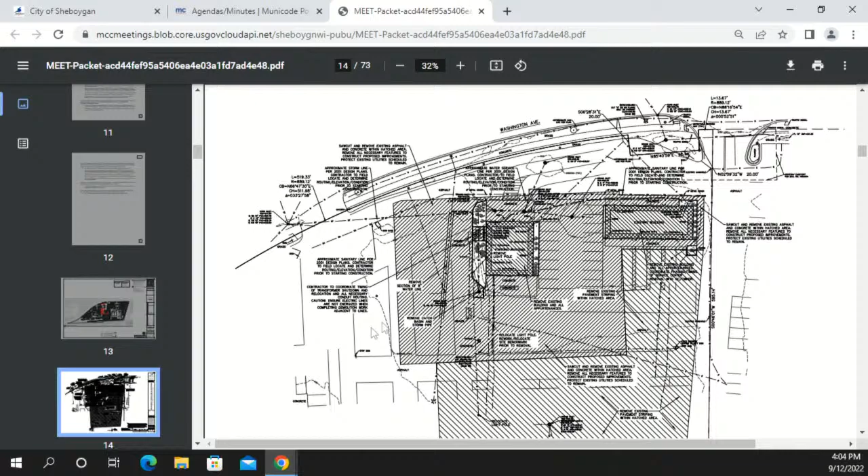I'm sure you guys are quite familiar with this location off of Washington Avenue. Currently what exists out there is the Quick Lube building, located on the left, and a 2-bay car wash located on the right-hand side. What the group is looking to do is eliminate both of those buildings and replace them with one single building, essentially.

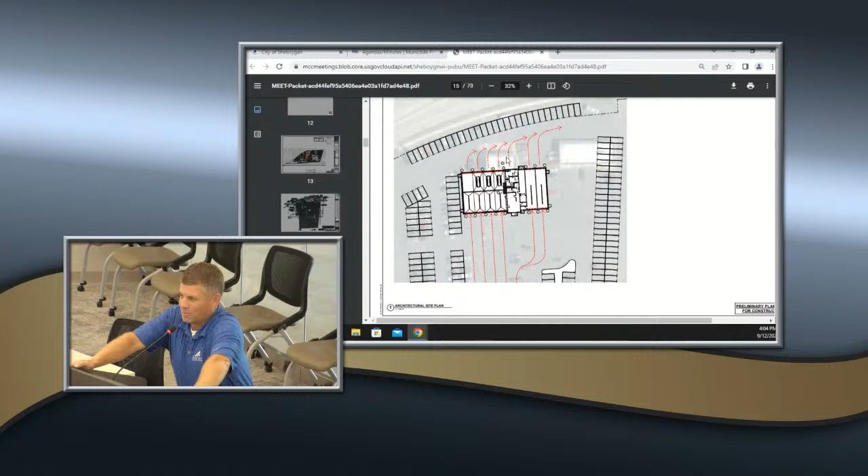I don't know if you can zoom in on that, Steve. Is that close enough? Yeah, that's fine. So what this represents is basically a dual building that'll house both the car wash, the 2 bays located on the east side of the building, on the right side there. You'll have an office area, bathrooms just left of that. There will be 3 quick lube service bays just left of that, which will have an 8-foot pit for oil changes and whatnot, as well as storage of materials and oil, waste oil, things like that. And then on the far left, there'll be a designated emissions test lane, essentially.

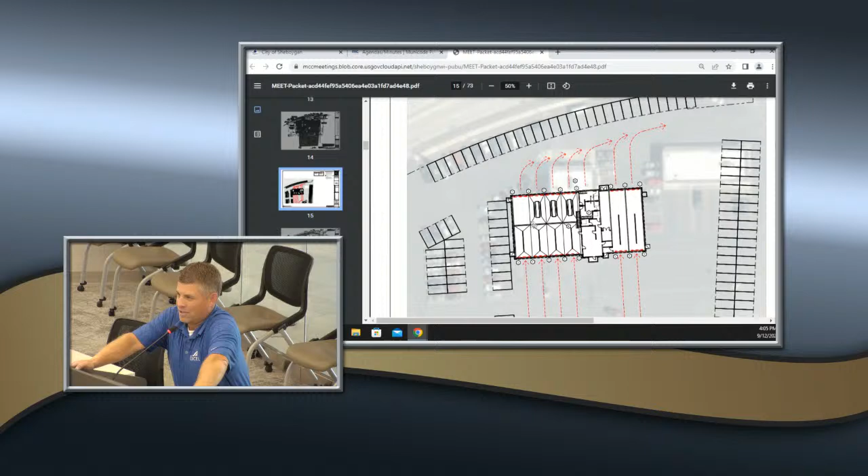Then, if you want to flip to that, we'll reconfigure all the line striping out there in the vicinity of where the two existing buildings were, allowing the new building to fit, reconfiguring striping for the vehicle lanes, and then filling in where the old buildings were with vehicle parking and vehicle storage.

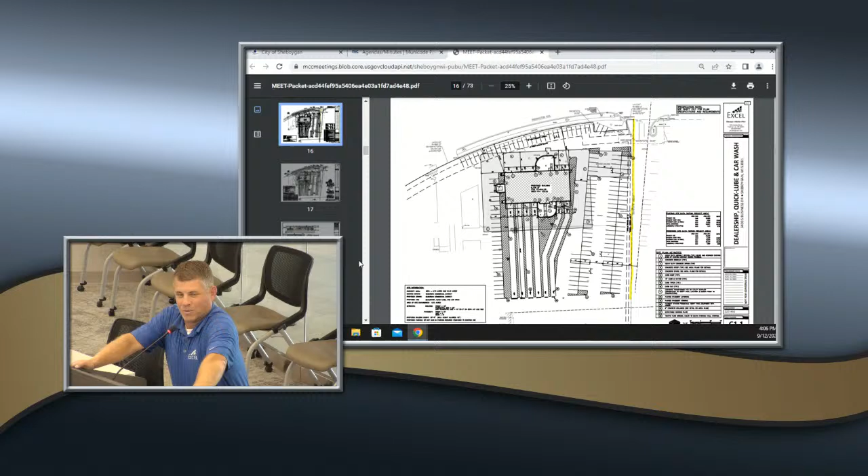I know it was mentioned in one of the staff comments about the dumpster enclosure not having one. We will be proposing one, most likely on the west side of the building. Right now we're thinking split face masonry block, painted to match the main color of the building. And for the gates, we'll be looking at steel construction with either painted cedar wood or Trex composite, no-maintenance material.

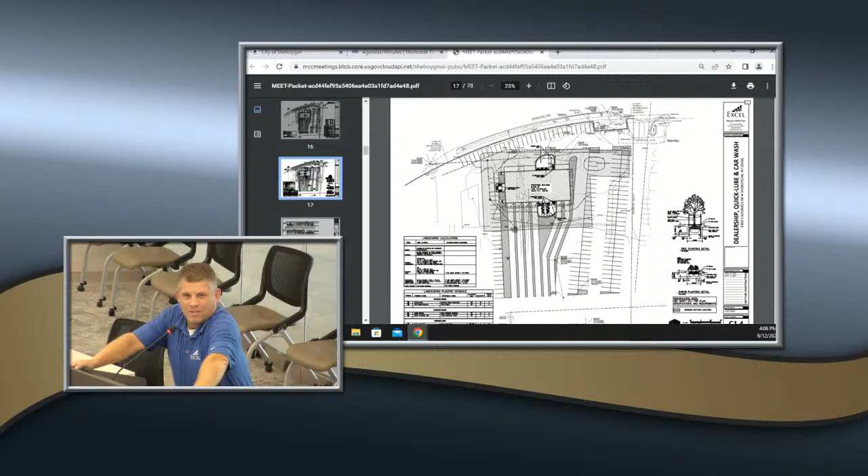Guys, I don't know if you want to talk about the architecture a little bit.

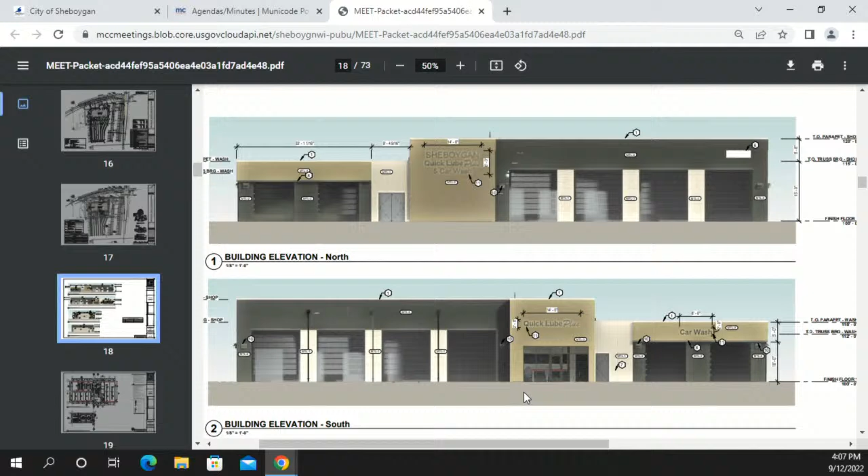Sure, yeah, so this is Kyle Jameson from Designer Group, and these are the most updated elevations that we have. So we're using 3 colors.

All pre-finished metal panels on the outside, and what we're doing is essentially variations of those colors in order to break up the facade. The north elevation is the elevation that will be street facing. So by breaking it up into its different components of car wash and shop space, as well as that center, I believe the color that they call that is...

It's not champagne. Champagne is the white color, but the gold flake type of color that the signage is on is that center portion, and that is actually pushed out, a plane compared to the rest of the building.

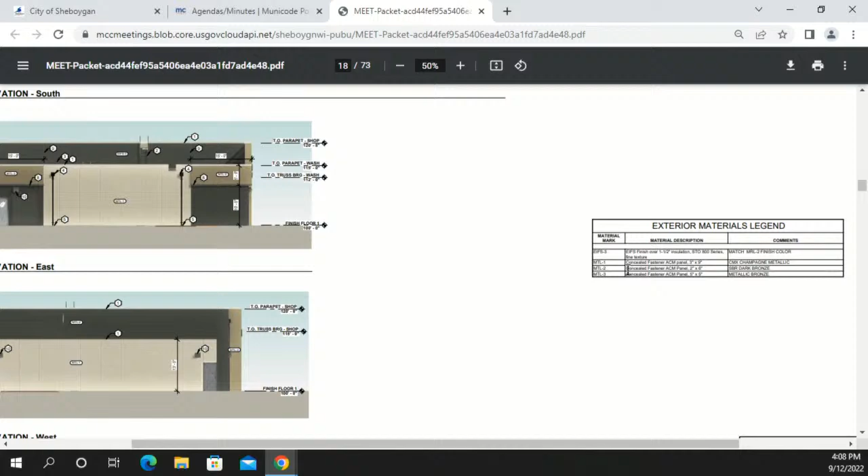So it's just a variation of depths and colors in a way to break up what is otherwise a pretty large facade. And then we also are using glass overhead doors in order to break that up as well.

The major entrance is going to be on the south side, south elevation, where the lobby entrance is, as well as the queuing of the lines for vehicles coming in. There's going to be signage on both sides of that, as well as possible signage on the west side.

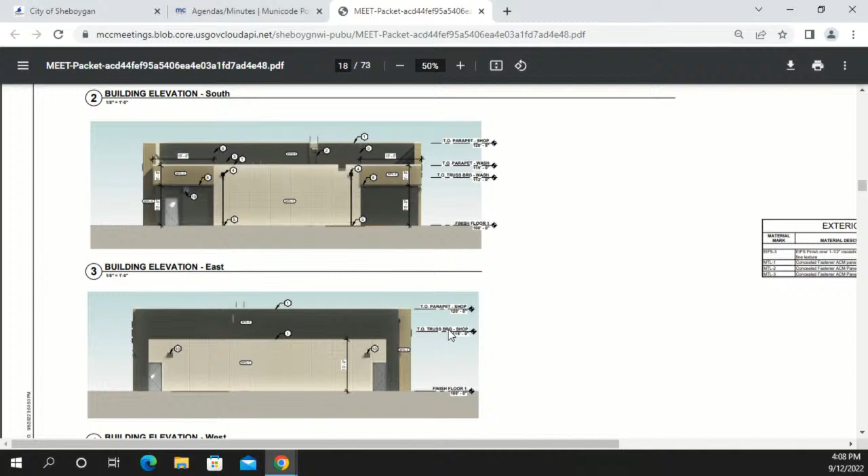I think part of this project was asking for the signage.

Yeah, there's some questions about signage, and that would be before Plan Commission tomorrow. So you don't have to worry too much about that tonight, other than just describing a little bit of what you guys are looking at.

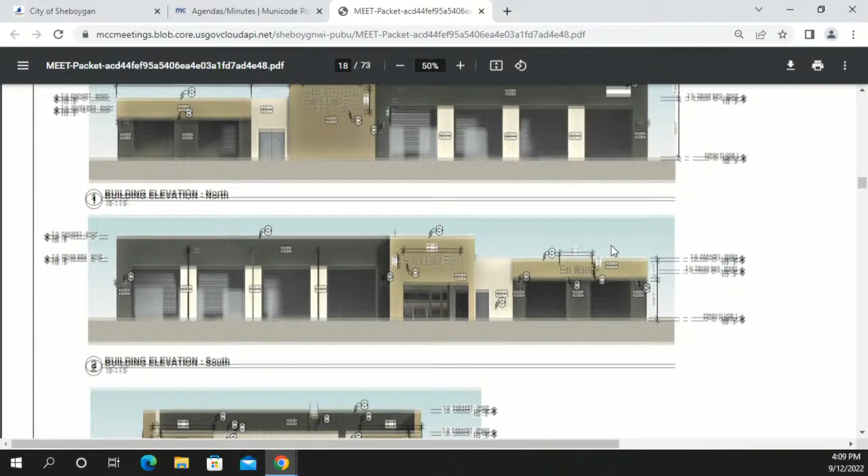Sure. So if we don't have to worry about that, the other thing is that central gold portion that kind of runs north to south on there has a lower parapet, or a lower roof, with a taller parapet, and that's where we're going to put most of the mechanical equipment in order to hide that from the street facing as well as customer facing sides.

So part of what we defined in the elevations of these buildings was also designed to help step and break up the facade a little bit, so that there were variations in heights to make this easier to visually see and not be so harsh, but yet complementing the 2 car dealerships that are also on the site. And like Kyle was saying, the doors and the color variations were designed to help break up the facade.

Any questions, I guess, you have for the exterior that I could help assist answer for you? Yeah, I will start out with those.

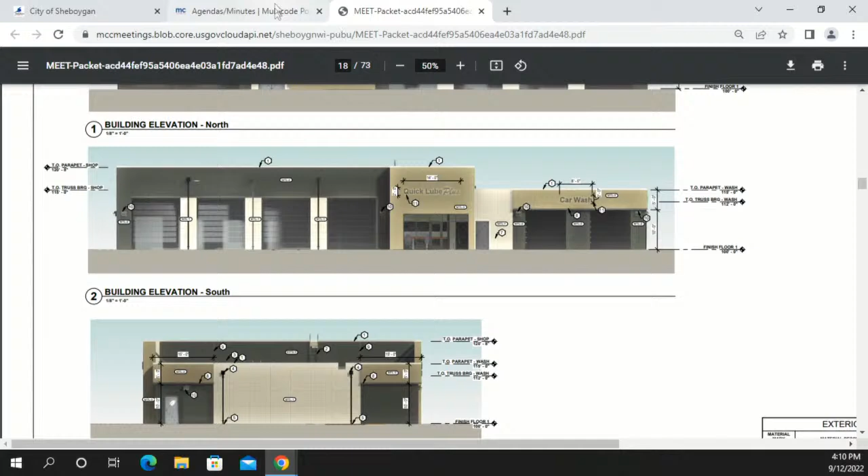You mentioned the complementary to the other buildings on the site. I guess I'd like just a little more clarification on that, since it appears to be so different in color from the other buildings. It'll definitely stand out, and I like it as a building. Just curious about the thought process with being so different from the color schemes already out there.

So I can address this. This is Nate Herbst, the applicant with the Rydell Company. There's 3 primary colors, and one of them is champagne metallic. It's a silver ACM paneling that's probably the primary color on the building, and that color really kind of ties the building into both the Chevrolet facility and the Chrysler Dodge Jeep Ram facility.

But yet, those franchises, the OEMs, the manufacturers, tell us what colors we need to have in order to be compliant with those brands. So we have one color that ties the facility into both manufacturers, and then we have 2 colors that are...

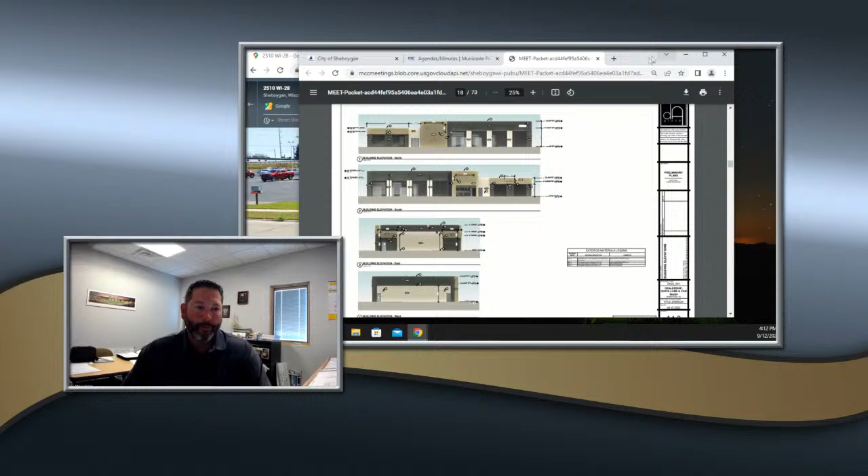...not the manufacturers', because this is an independent facility. It's not synonymous with GM, Chevrolet. It's not synonymous with Chrysler, Dodge, Jeep, Ram, and we felt that was important, to make sure they blended in, but this facility is also unique to itself.

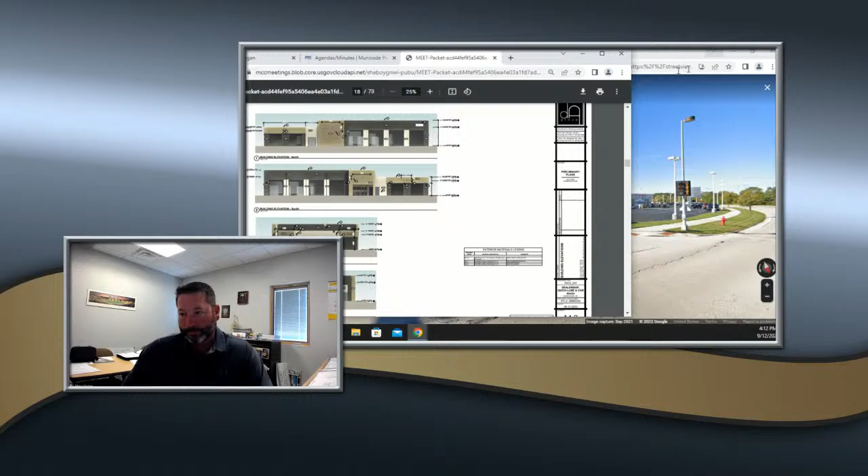Okay, and then a couple of other detailing questions. The yellow, I think you called it the gold flake color, it seems like where that generally falls on the building, it protrudes out from the rest of the facade, with the exception of the west elevation.

Although that may have changed from what I had previously. I was out of town last week, and I got an opportunity to get the new drawings that they had previously sent to me attached. So there could be some changes that may have addressed some of those issues.

That does answer that question. The revised drawings take care of that issue. The second question I had was about the band of the gray EIFS. I think you still have it as EIFS.

I believe the council chambers is muted. Technical issues, so you can't hear us right now? We can now. Okay, thanks.

So on the east elevation, where you have the building step and you transition from the metal panels in the gold flake color on either ends of that high element, and then you go to EIFS in a gray running above the roof wall connection there. Just curious if that was something that could be maintained as the yellow metal material, or even eliminate that, since I think that was the only EIFS on the building, just so that yellow element is more continuous.

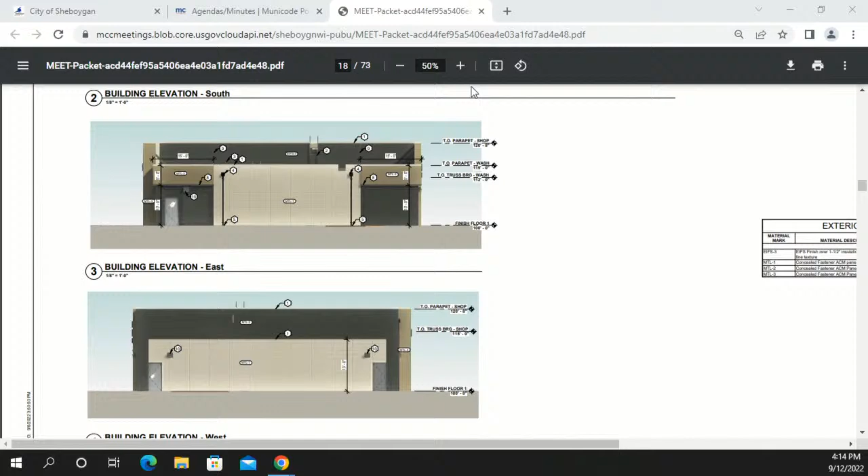Yeah, so on what you're seeing as that sort of black color, if you go to either the north or south elevation, on this elevation right here, on the south elevation, that black wall is actually a continuation of that larger mass with the overhead doors. So it's actually, when looking at that south elevation, it would be the east side of where the gold flake color is, where that wall exists.

You're just kind of seeing through, since there's no mechanical or anything showing on that elevation where you see the EIFS. And so it's inset quite a ways from that gold flake color. And being most of your mechanical equipment's going to be a grayer tone, it would be more advantageous that it's going to blend in with the darker gray and not stand out from that east side as you would approach from that direction.

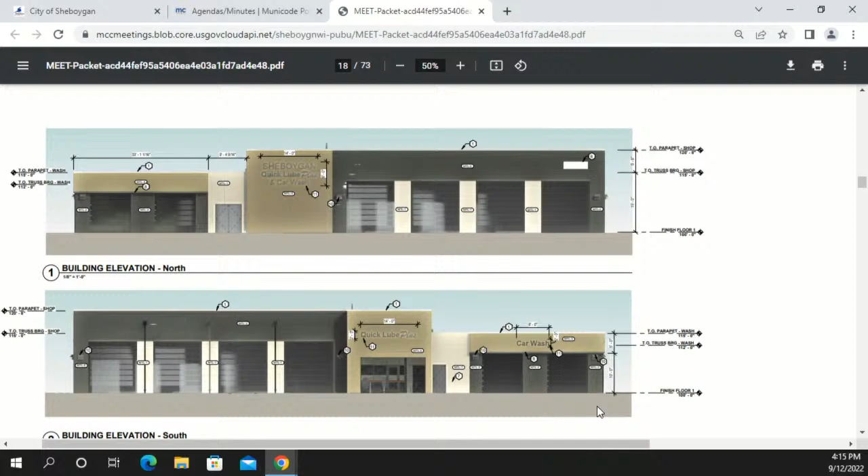Versus trying to go to a gold flake, you're going to have a tendency to see any of that equipment more so stand out against a gold background than against a gray colored background. That would be my only reason for wanting to keep it to a darker color tone, is to help hide somewhat of the mechanical equipment that would be along that face, while still having some break up to the exterior look of the facade.

Yeah, okay, I see that with the ladder placement on the north and south elevations. Which then leads into my next question, which was, you've got the big parapet around the lube bays. What about equipment above the car wash? What equipment is there, and is that also screened? What is the parapet height there relative to the equipment?

So all of the equipment from the car wash will be above the lobby space. Otherwise, most of it is internal, next to the lobby, and sort of what we've been calling the core space, which is the lobby, restrooms, locker rooms. All of that is sort of that gold area with the champagne color next to it. That is the core, right in there, that long skinny mechanical space next to the lobby, between the lobby and the car wash.

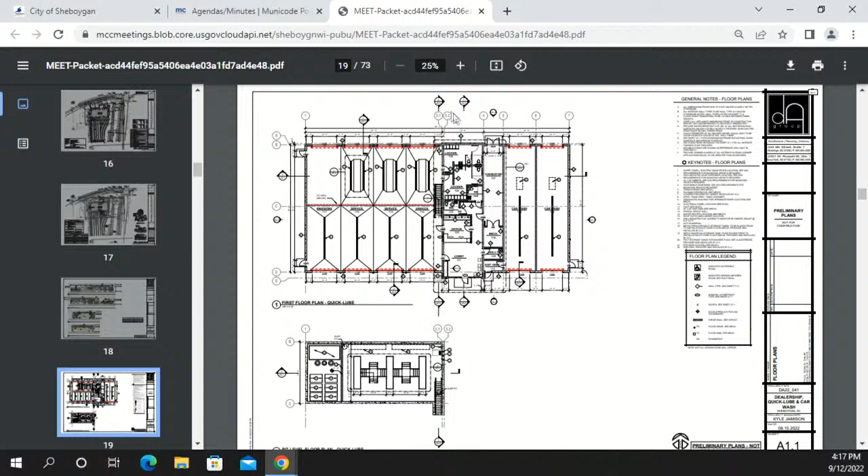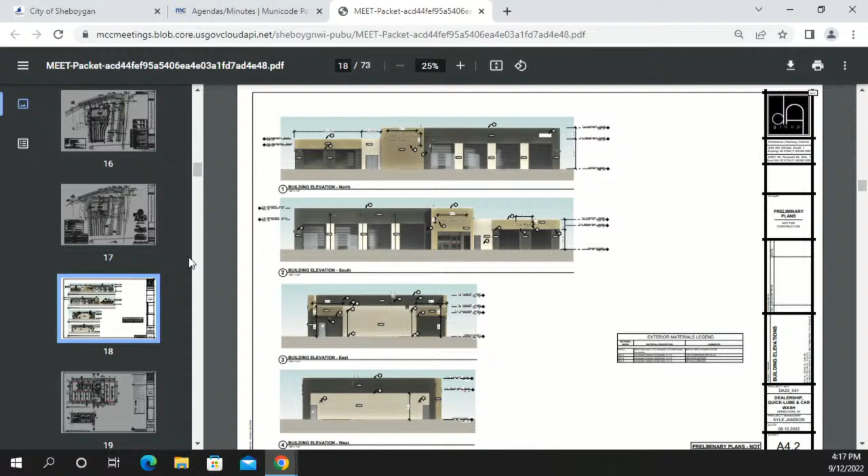There's going to be a lot of things for that car wash specifically in there. If there's anything that needs to go up on the roof, it's going to go above that lobby. But you're saying that is all exposed from the east, so we would be seeing it there on the east elevation? You would see some of it from the east elevation, but all of the equipment is way up against that backside of the building again. Most of the equipment is going to be a couple rooftop units, I think there's a total of two. They might have added a third one, but there's two rooftop units.

So if we needed to put something in there, would a mechanical louvered screen system along that face, matching the color scheme of the building, be an acceptable alternative option if it was too visible from a long ways away? As I'm envisioning what you're describing, that would be ideal.

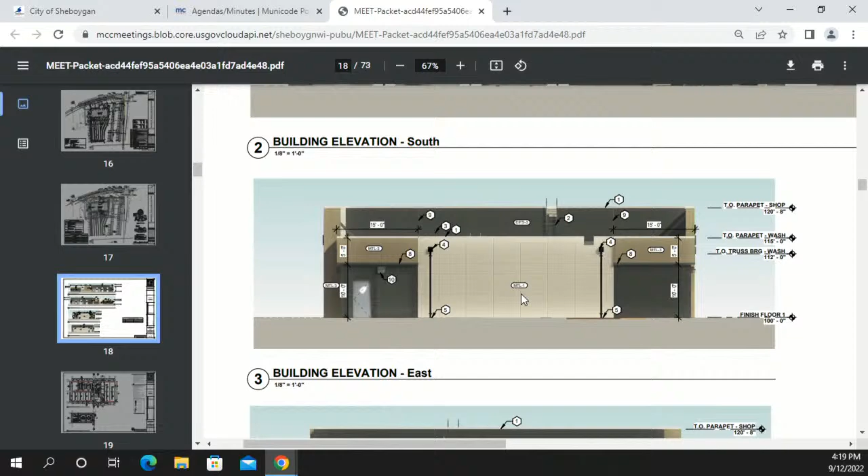To kind of create a third or fourth side on that raised gold flake element that hides the equipment behind it, I guess looking at the sight lines from the east as you drive up to the site, just to see what those are relative to the height of the equipment. I think that would be critical.

As I'm picturing that drive-through from the east coming toward the west, I think that's probably going to be visible, but some sort of screening there would be great. If color-wise it can tie into that yellow flake, that would be fantastic, but even something more subdued there would be okay too with me.

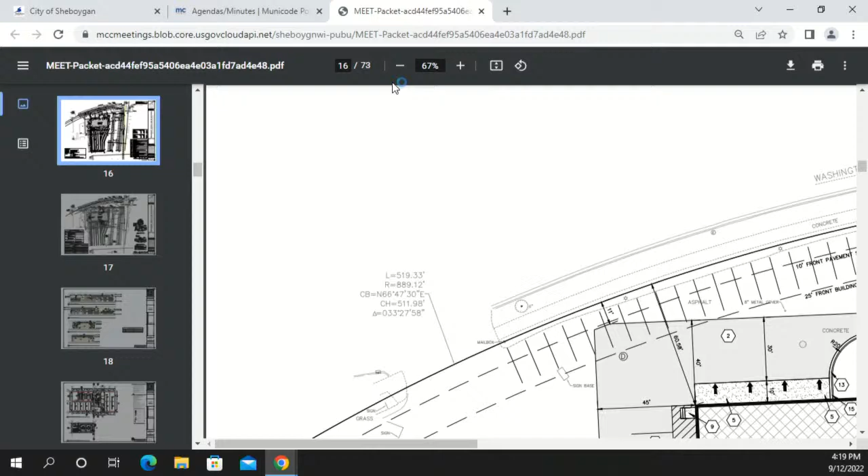Going back to one of the questions, the dumpster enclosure - you said that is on the west side, or maybe I misheard that. Is it on the west or the east side, closer to the car? It will be on the west side. I believe it's not incorporated into our elevations quite yet, but it will be. If you zoom in on the site plan, it is showing on the west side, roughly halfway.

So I know there's a transformer there. Oh, that's the transformer. The car would be between the transformer and that northwest door. And that transformer is likely going to shift locations based on discussion with the power company.

And where is that going? Shift to where, do you know that yet? Based on discussion with the power company, I believe they want to locate it on the east side of this newly proposed facility, so that we can temporarily feed the existing quick lube during construction.

Looks as if that's going to be getting a little tight to your drive lane there. Yeah, most likely we'd fit it into that cross hatching on the east side, and if we've got to slide the building over a few feet, we'll want to maintain that 24-foot wide drive. Just concerned with whatever screening around that transformer being right up to that driveway - a little buffer there would be nice.

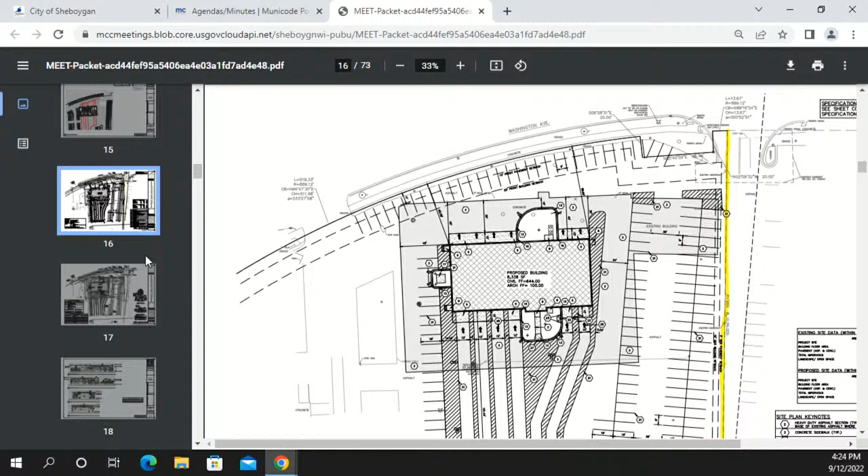I think the things to think about there are, in its present location, it's just next to parking spaces. Where you're talking about putting it now is going to be in a travel lane, so it would be more susceptible to vehicles, I guess you could say.

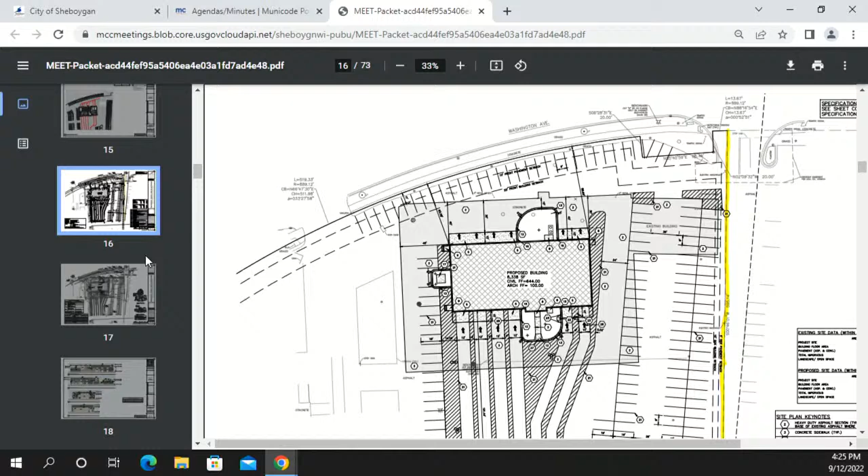Sure. Although if I'm reading it right, that isn't your main drive lane. You're still coming in from the lights a little further to the east, so you'd be driving down south of the facility and circling back. So it's maybe not as big of a concern as if it was right next to that main drive lane.

And no matter where it ends up, if we have to put a few bollards in and a protective curb around it, we're going to do what we have to do to protect that equipment, and provide the adequate screening as well. Which actually brings up the question of landscaping, whether that was reviewed by us.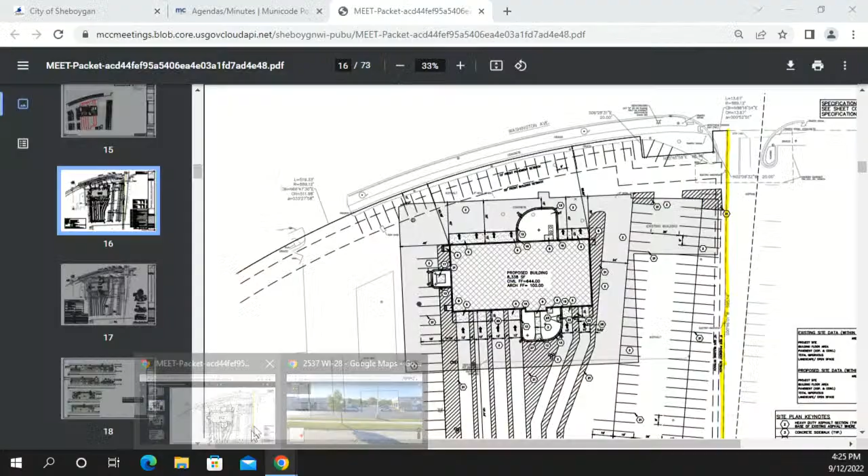I mean, it's part of our review a little bit tomorrow, but they show a little bit along, in this case, they're screening the transformer a little bit at their entranceways and things like that, so they might be asking for a few exceptions for foundation plantings and things like that, and relocating the number of points. But this is so far what we've received. Location exceptions? Yeah. Yep.

So we talked with Plan Commission tomorrow.

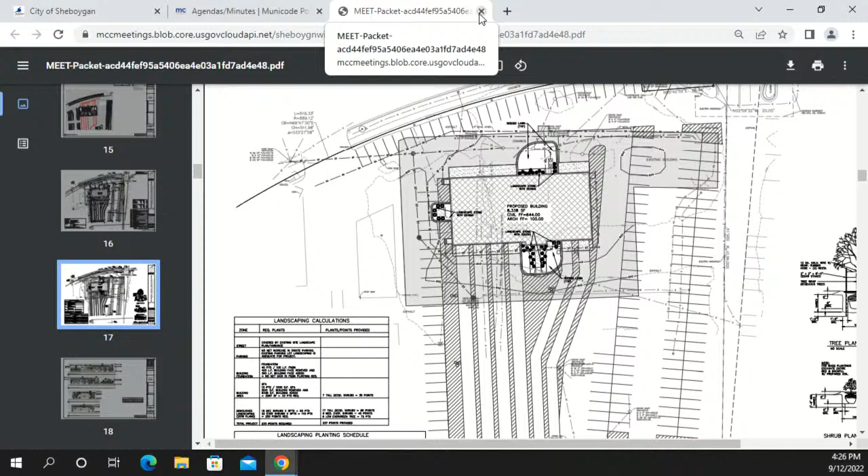Other questions or concerns? I'll make a motion to approve subject to staff recommendations and your additions. What I had in my notes were to be resubmitting plans to address the finalized transformer and dumpster locations and enclosures, at a staff level, correct? Yeah, to a staff level. Granted, if staff has concerns with those, it may get kicked back to architecture review, but hopefully that can just be resolved with Steve.

And then the other thing was the sight lines to the rooftop units or any equipment on the roof, and if need be, adding that additional screening and just getting elevations updated with that. So based on those items, that's correct, those were the items you wanted on there, Jim? Yes, it was. And everyone's clear on what we're voting on. We have a motion and a second. Any further discussion?

Hearing none, all those in favor signify by saying aye. Aye. Opposed? That motion is approved. Great, thank you very much everybody. Thank you.

Moving on to item number 6, the proposed construction of an addition and exterior remodeling for the dermatology clinic at 832 Michigan Avenue. If the Abacus team could come forward and make introductions and give us a brief rundown on what you're proposing there, please.

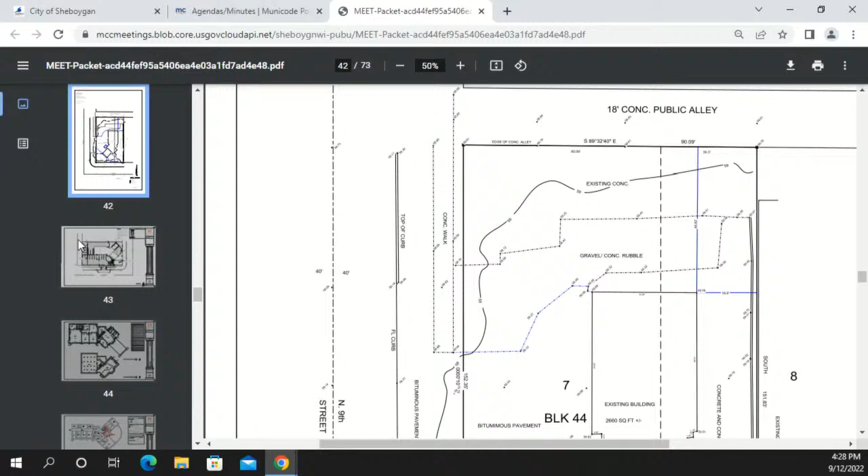So the proposed project that we have here is an existing vacant building. It's currently unoccupied. It used to be an old collections building at one point.

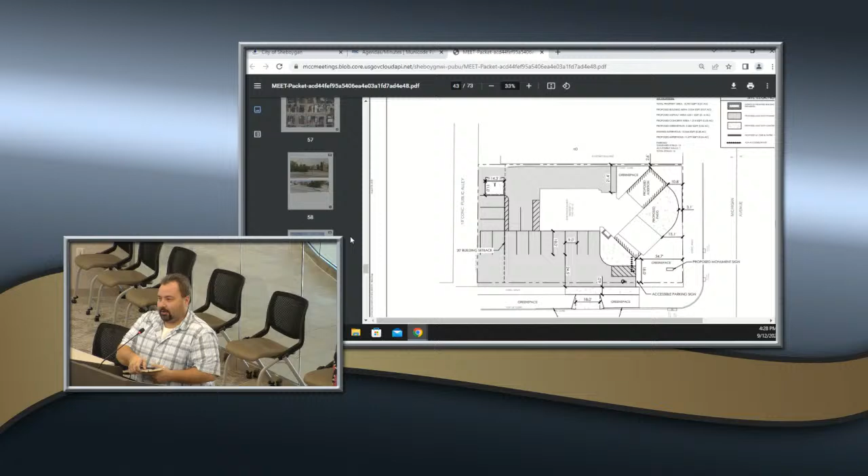And Keith, before I interrupt, could you step to the podium so it gets picked up in the mic, just so our recording gets it. Can you hear me better?

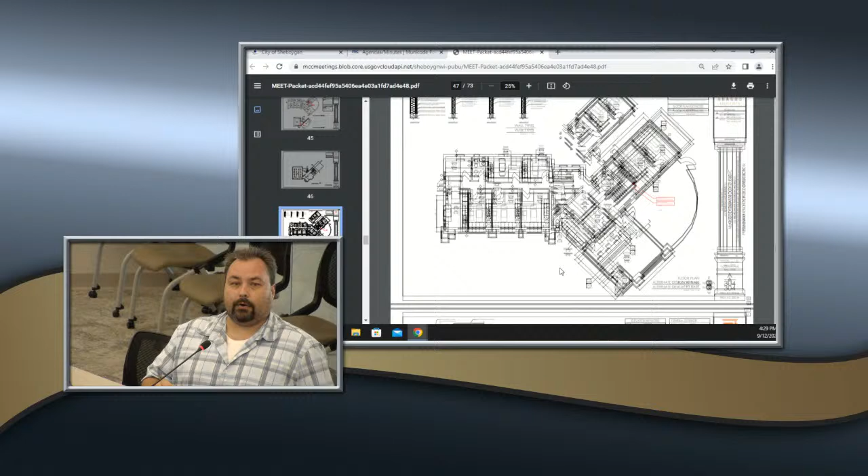So we're converting an existing building. It's a currently unoccupied building. Previously, it used to be a collections agency. Prior to that it was an automotive garage. Right now, we're looking to renovate it into a dermatology clinic. We've got some existing spaces inside, and we have a portico that's off to one side that's existing. We're looking to infill that portico, turn it into a waiting room and reception area.

On the southeast side of the building, we're looking to put on a little extension to add a couple exam rooms and a stair down to the lower level. The renderings you're looking at here show the front side of the building, which actually faces the side street, 9th, not Michigan.

The curved window on top is the existing portico we're looking to infill, along with the existing structure that creates the column wrap around that window. From the left, there's currently an asphalt roof, a little mansard roof on the side. We're looking to peel that off and turn all the asphalt into standing seam. With this addition in the portico area, we're looking to pull the face of that wall out to align with the wall just to the left, giving more room for a waiting room and a true vestibule coming into the space.

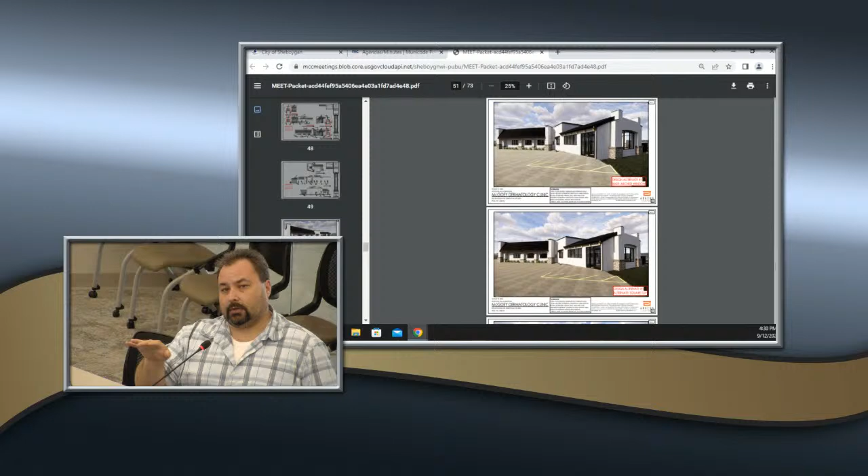That will change the slope of that roof slightly. We're looking to add some aesthetic glulam beams to look like they're holding and supporting that roof. The standing seam would be a dark bronze color to match the storefront and windows we have.

The top rendering here is a little farther left in the view. These used to be the old bays that led into the garage, filled in with windows and walls at one time. We're looking to retain most of that. The one window on the far left, we're looking to switch out and make a little smaller to work with the footprint inside.

There is an existing mansard roof over what used to be those garages, now over those windows. That is also asphalt roof, and we're looking to peel it off and make it all standing seam.

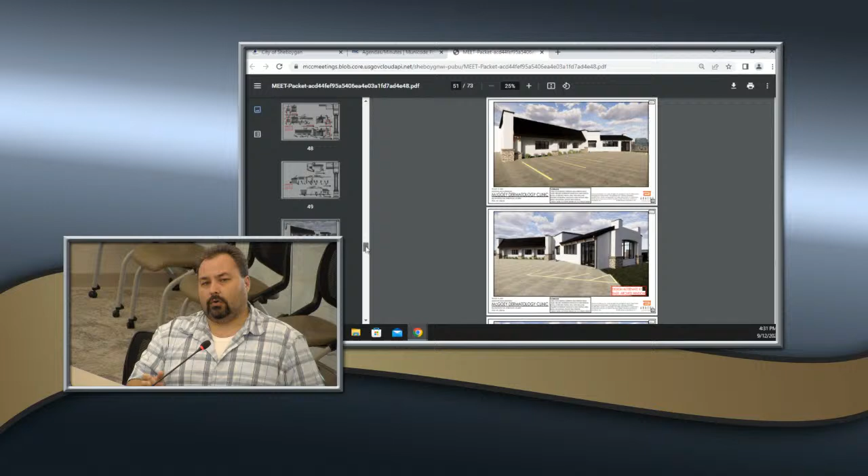The style of this building is an existing Spanish style, with clay tile roofs along some of the main white portions of the building. We're looking to peel some of that off and make it more traditional. The Spanish clay tiles would all be removed and changed to a metal cap flashing to match the standing seam.

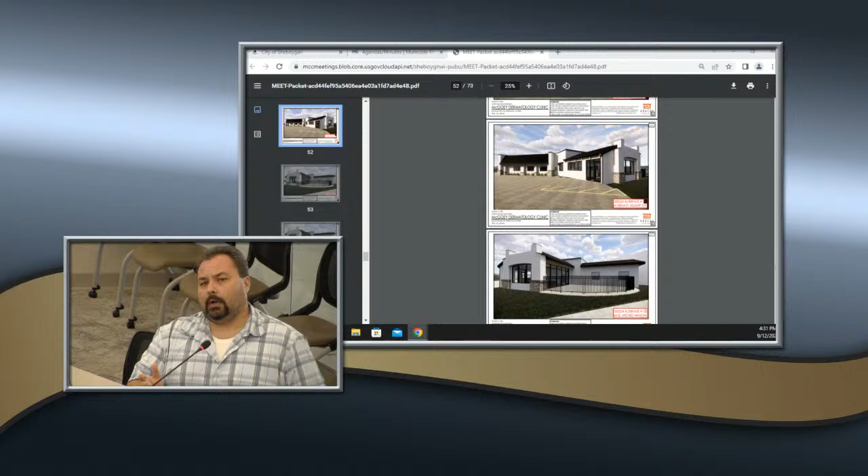The facade is kind of a light pale color. We're looking to paint it new. One option is skim coating the existing structure, which right now is metal lath and plaster, very hard to clean and maintain. We're looking to potentially skim coat it to make it all a flush look, without that Spanish style curved look you'll see in some of the photos.

Barring not being able to do that, depending on how the suppliers come back regarding adhering to that existing material, we may have a concern. If so, we'll just look at repainting the facade with a nice light gray color.

Also along the front, at a couple of the column bump-out areas, we're looking to add a little stone veneer, giving it a base with a cultured stone look, plus a precast cap on top of that.

All the windows around the new waiting area would be an aluminum frame, like a Kawneer type system. The windows around the building are a mix of existing wood windows and glass block windows. We're looking to update the glass blocks, pull them all out, and put in new aluminum clad wood windows to match the other windows we're proposing.

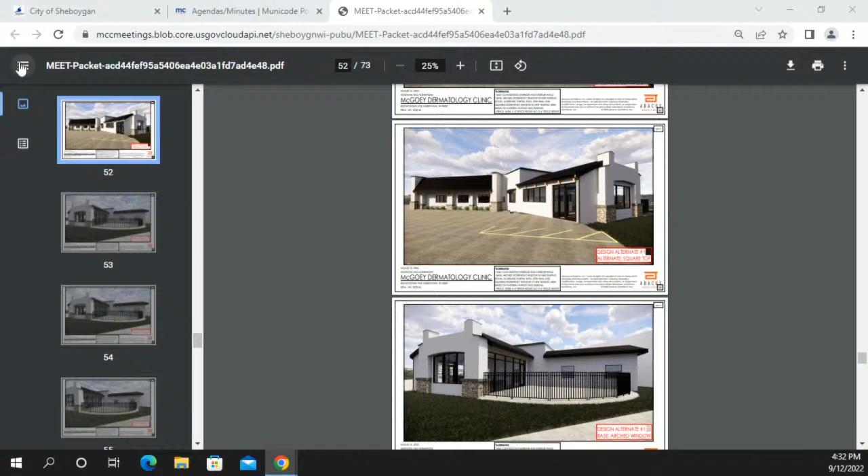Along the new addition on the right side where we're bumping out the building, you can see on that rendering we're looking to put in two more exam rooms with a stair leading down to the lower level. In that building, we're looking to use wood stud construction, combustible construction type 5A, or type 5B, sorry.

This facade would be just EIFS on top of the wood stud backup. The EIFS would be colored to match the rest of the building, so it would all be that light gray color.

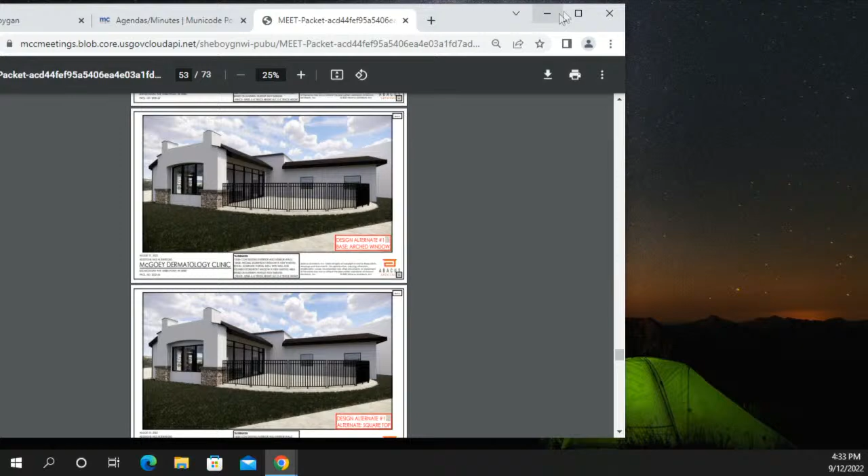We are proposing a small mansard roof on that addition as well, except it would only be on the 2 sides that face Michigan. The backside towards the property, which actually comes right up to an existing building, we're looking to slope the structure down in that direction with curb and gutter to collect, with a gutter and downspout to collect.

We're proposing in this curved area, which is along Michigan, infilling that with a patio and putting in fencing around the perimeter. We showed 2 options here. We're looking at different concepts of what we're going to purchase for fencing. We kind of like the double rail on the top, but we got to dig into the actual manufacturer for that, so that's why we proposed 2 different options there.

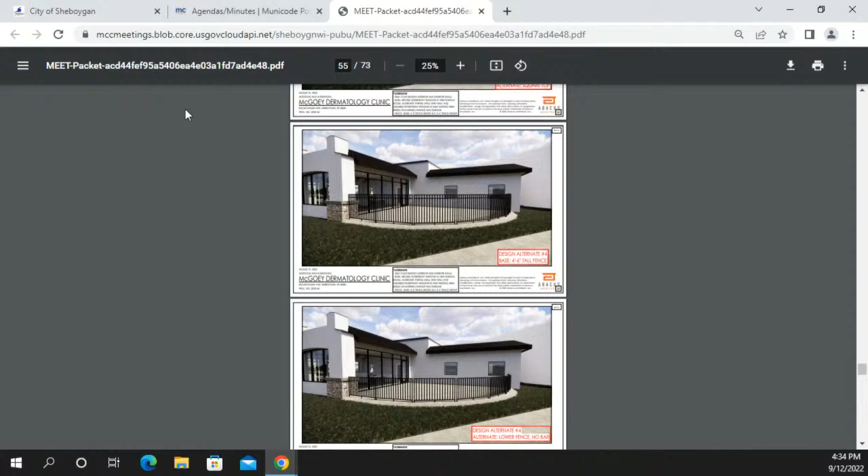So that's the main concept on the exterior. I'm sure Suzanne could talk more about what the facility is proposing to do.

Sure. The only addition I would have to the exteriors is currently it's basically broken concrete and also not paved in the majority of it. So in addition to cleaning up the exterior of the building, we'll be also repaving, remarking, and re-landscaping everything so you can see the building from the street.

Do you guys want to know outside only or inside? We're actually only addressing the outside, so whatever's happening inside, unless it relates directly to the facade, is really out of our venue.

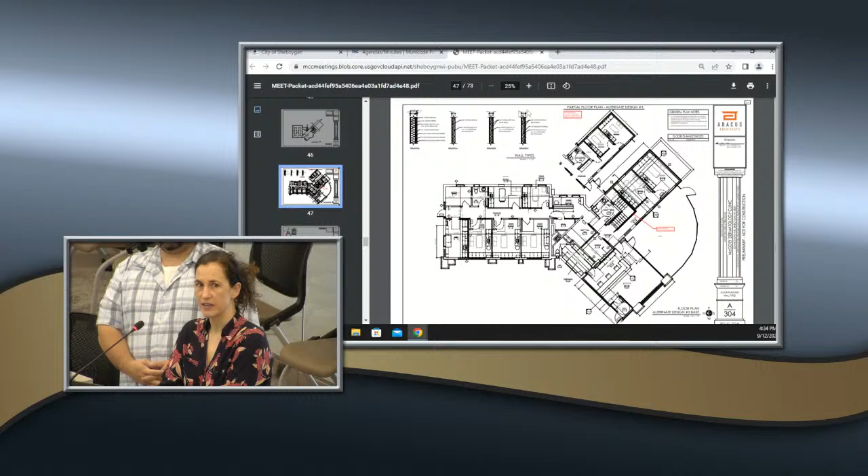The only other thing that we didn't discuss is signage. We do plan on bringing things before the board with the sign permits and whatnot, but we're planning on likely a monument sign abiding by all the regulations. I can't name all of them, but 15 feet away and not obscuring the view of traffic, et cetera. So we are working on that aspect as well. Not planning on a building mounted sign.

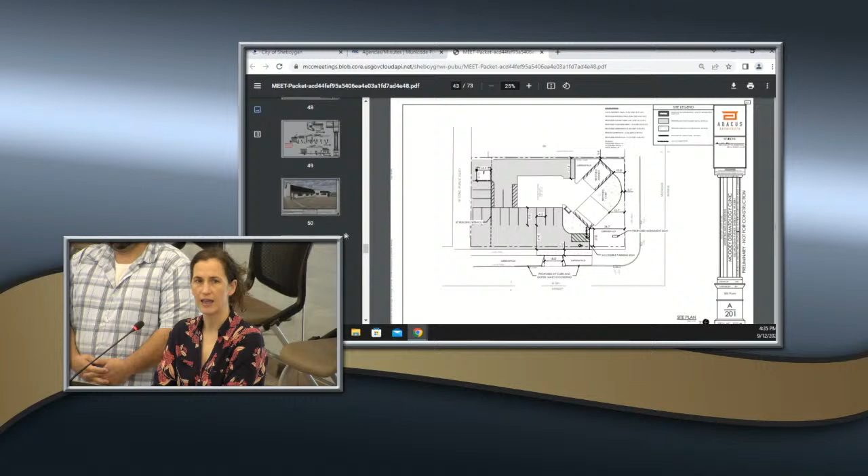And the other variation that we didn't discuss is the window itself. Right now, we would ideally like to do that curved window that matches the existing opening to the basically closed-in reception area, but it's going to be a supply chain question about availability. So we did present the option of it having just more of that square front.

In addition to the exterior and the fence, those were basically the options. There is a 4th option you'll see there where we were discussing whether or not we're going to do the stairwell, but we are planning on moving forward with the stairwell, though that's relevant more to the interior. Happy to take any questions.

Great, thank you. I guess first off with the alternates, since there were a lot of them and there were questions, could you go either way on those? Maybe to address those first, from my perspective, I didn't have a problem with whichever way you went on those alternates. I thought they were all relatively similar, and I certainly understand the supply chain issues at the moment. Any other concerns or things that the board saw that they would like to push one way or the other on those alternates?

My big question is, it's not really huge, but on the patio, what's the function of the patio? Just a seating area or? Plan is basically as a seating area, so whether it's patients on a nice day who want to go outside and sit, or staff having lunch breaks outside, we thought it'd be nice to get sort of foot traffic views for Michigan Avenue, especially through that redevelopment, so our plan was to try to make that more of an approachable space.

Yeah, and with that in mind, I would probably vote for the lower fence. That's just me. Just so you can have more of a sight line view versus the higher rail. It comes down to are you keeping something in or out, that kind of mentality. To be perfectly honest, our plan was to go with the higher one if possible, that's why we did put in for the exception.

Okay. Our concern is partially availability of that fence and the structure of it, it's not able to be cut down lower because of where that bottom bar is. The other part is this area of town does have a lot of bars at night. And given that our traffic is basically business hour traffic and then it goes dark and then there is bar traffic, we do want to make sure that we maintain the exterior in great condition throughout the course of our use of it.

Sure. I was going to mention the bars and comfy furniture in there. Right, high fences may be good. But that is one of the concerns. That's going to be such a visible corner for that patio.

Just making sure that it doesn't end up being a space that collects clutter. I hate clutter. The entire design inside of the clinic is to be not clutter. So if there is one theme of how I plan on designing everything, it's no clutter.

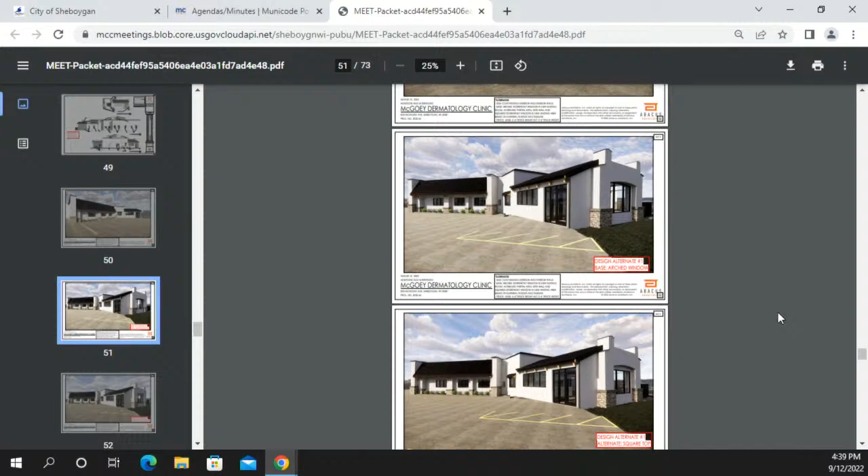To me, this is very much a professional space where I plan on spending my entire career. I've lived here for 6 years now. I plan on setting up shop and staying here and raising my family here, so I do not want to ever have to move out of this space. The maintenance of elements of the character, as long as this is done cleanly and nicely, should work out well.

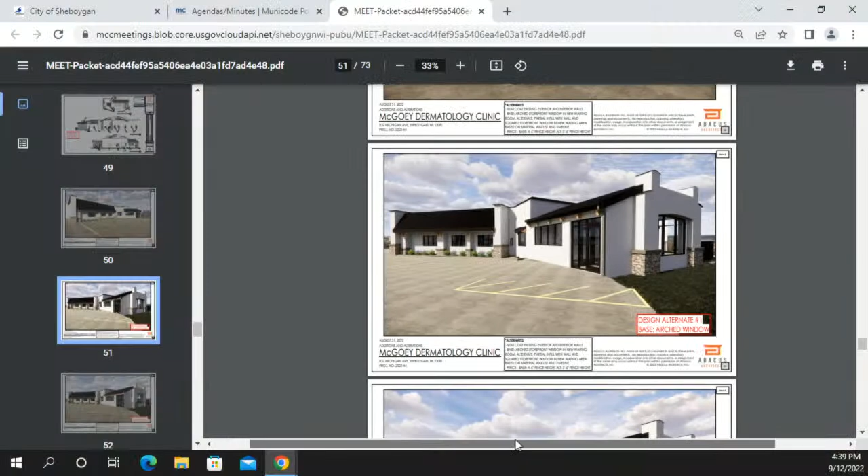One of the things, if you stay on this view, Steve, at the main entry where you've got the existing portico and you're adding the sloped roof area coming out from that - one thing that jumped out at me was that the portico, the arched element with the piers on the side, is getting integrated into the new wall coming out. I wondered if there was a possibility to introduce another glass frame element that would butt up against that original portico, just to set it off as a separate piece.

Are you referring to the side of the vestibule basically being glass? I believe we were told from a support structure standpoint it had to be solid surface. We actually originally had designed it as glass, but it couldn't support the new addition.

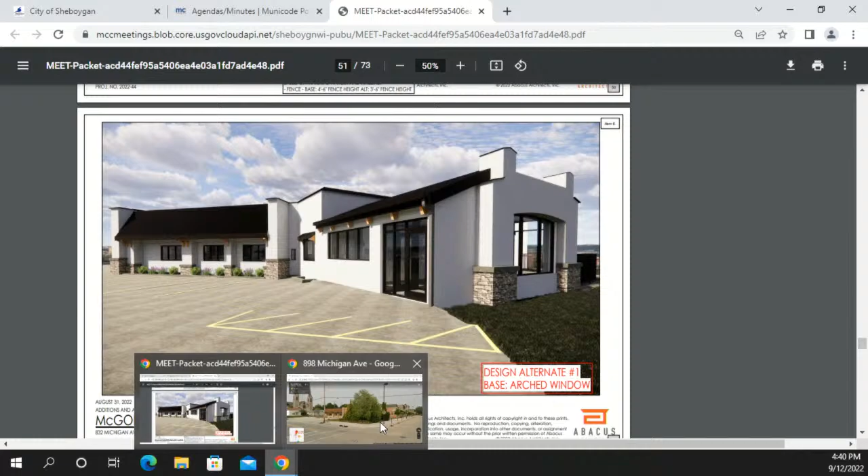So what happened there - the original design was to have glass there. With the pushing out of the frame, since we're changing the slope of this structure and attaching to an existing steel beam, the structural engineer needs a chunk of shear wall in order to keep the moment frame of that piece together. So we had to compromise and give a chunk of wall back to create a shear wall.

We did look at another option where we could get a very little bit of glass in. We'd have to actually shorten the vestibule on the inside and bring the shear wall in past the column instead of butting up to the column. So there'd be a little bit of a jut inside the building that we'd have to address.

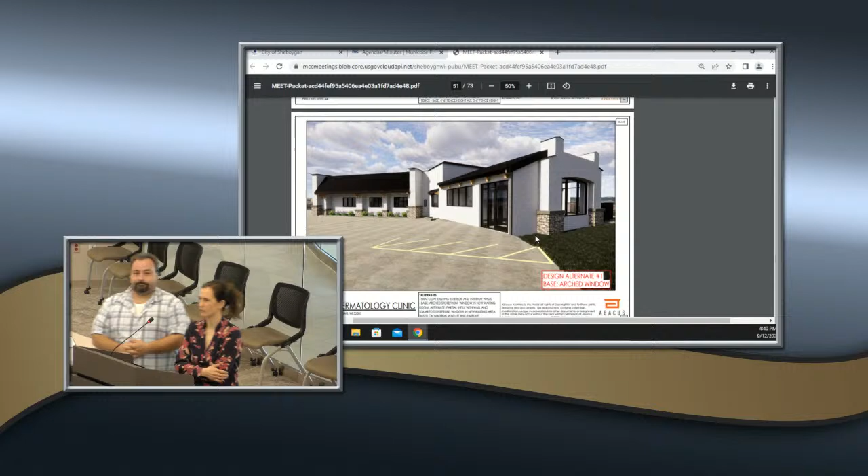Hearing that for the first time, I don't like that as an option.

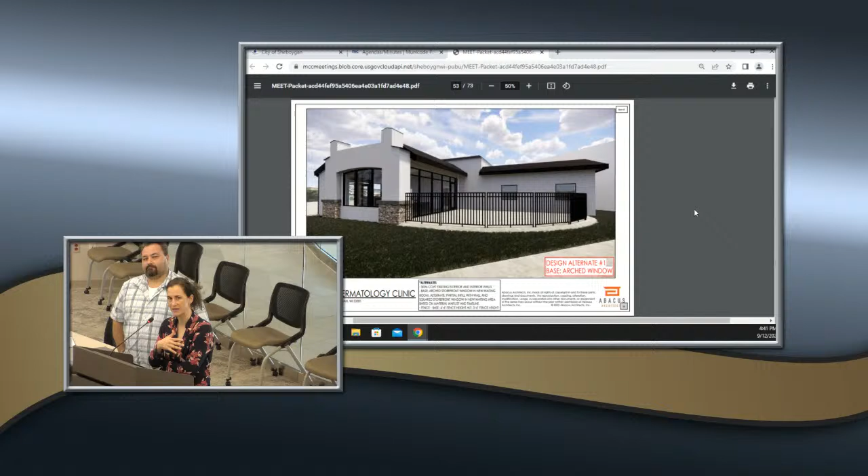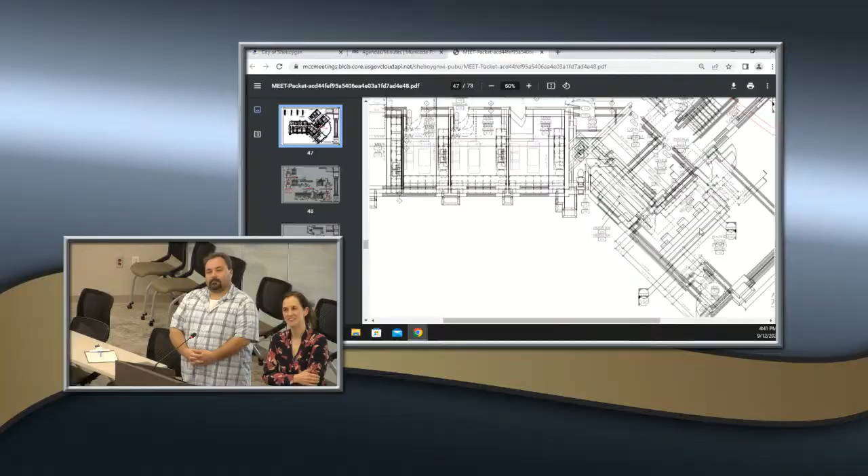Aesthetically, I love the window. I think what's going to happen is you're going to get a lot of natural light - on the other side, on the patio side, it's all basically storefront window, so you'll get a lot of that natural lighting into the space, and everything is really going to be light colored. I like smooth lines. I don't like a lot of indents and juts that affect the smooth transition between areas. Obviously I'd prefer a window, but I do like my building to be standing by the end of this - that's always a good result. And it wasn't so much about the windows as just trying to keep the character of that original portico as a feature.

The other side where I had questions was on the Michigan side, where none of your renderings actually showed the end of the building that will be visible from Michigan. It's sort of tucked back against the adjacent building, but as you come from the east, you are going to get a little view of it.

Go back up to that exterior elevation rendering if you want to look at it. We can go through that. That whole addition end out to Michigan is pretty straightforward and simple, and even if it isn't the main facade, it's sort of the most public facade. So it just seemed like that addition getting a little more character to it would be nice.

But understanding what's happening inside, I know you're restricted with what you can do with openings. That was actually an area where I wondered if signage would help - something on the building, just to give a little more intentionality to that end. Sure. When you're talking about the visibility, are you talking about that side as the V comes out, the other side of the new addition?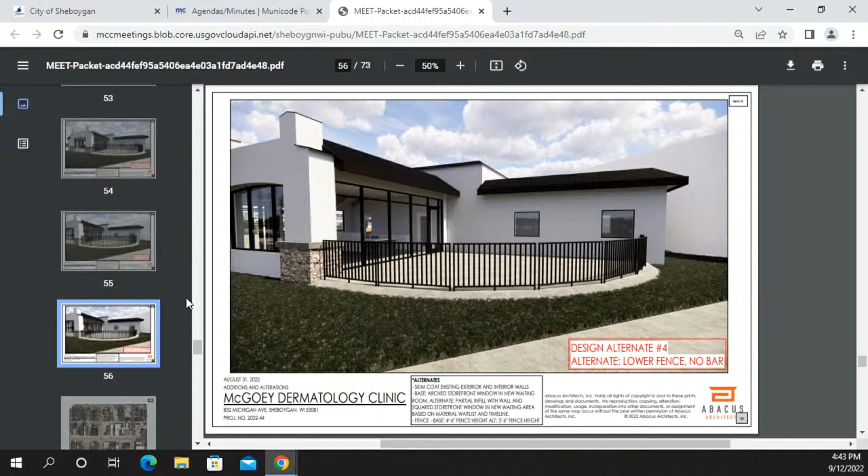Can you get the short elevation side? Is this what you're talking about? That view where Steve's highlighting with the cursor, as you come past the little print shop, you come out close to Michigan, fairly tight with the corner of the addition to that building. But there's still a big blank facade coming out at an angle before it angles back to another relatively blank facade with just a couple of windows. Yes, the patio is a focal piece, but the building itself is feeling underrepresented there. So is your major concern that short side, or the long side on the patio? It's a bit of both.

Speaking from the patio side, that is functional space, exam room space. From a window perspective, I don't know if that's what you're looking for. I can't have it too large from a patient privacy point of view. Is the elevations in there? I don't think it'd be in the conditional use permit, the one for tomorrow.

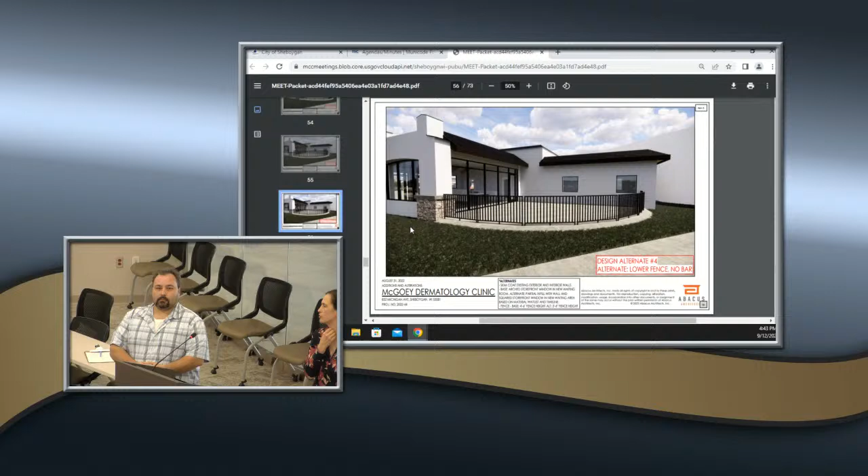Oh, here it is, we got something in the PDF. I'll pass this one around so you can see it. Is it in there? Am I missing some of it? It sets back to the building. Right, down a couple pages - 47, 48, there you go. Oh I'm sorry, next page, my bad, I missed those. So yes, there's a blank facade there.

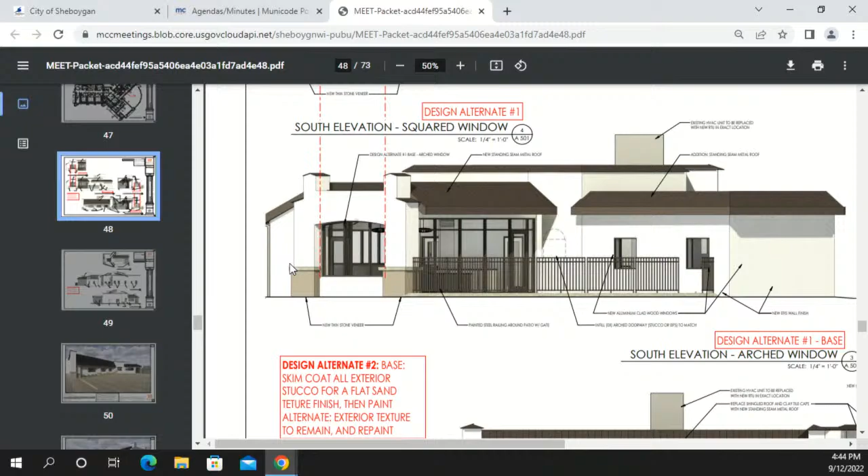We could add a little bit of window there, right here. And one thing to keep in mind, because we are 2 feet from the property line, we are required to have exterior rated walls there. So we're going to limit the openings to begin with, but we could introduce another change in material or introduce a false column with a little wrap on it, to give it a breakup, something like that.

I don't know what the solution is, it just seemed that part of the building was architecturally not real well developed, but it's going to be real prominent on Michigan Avenue, so just making sure that feels appropriately detailed. The current building, even though it's set back at that location, there's actually a fairly nice decorative element back there that we're losing.

So I'm just concerned I don't want that facade to be too bland on Michigan. Yeah, the tree hides it there, but going the other way there's another nice little tower element - I drove by there - and that ties in. Again, not looking to have you replicate the mission-style bell tower fakery.

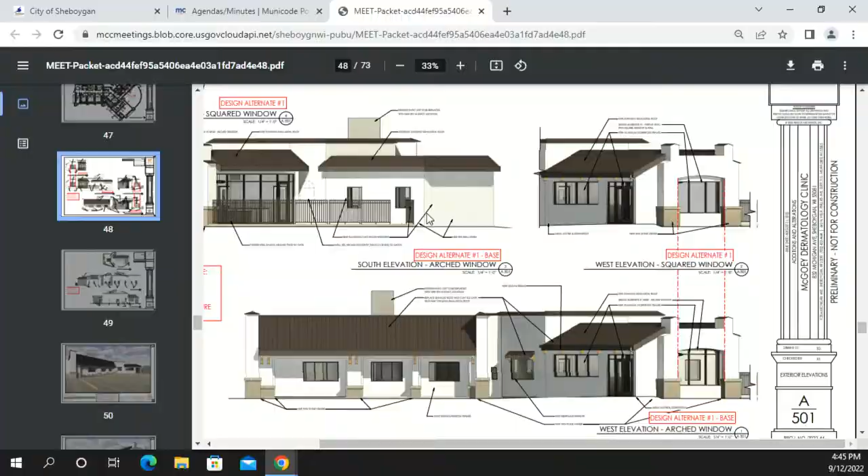But maybe it's picking up on something with the arch of the portico, to just have a slight recess on the facade. Maybe the windows there, if those are into the clinic, maybe having them full height to the patio isn't the best thing - if a clerestory band would be better through there. I don't understand, do you mind explaining that?

Instead of having the windows be a standard height, from regular sill up to head height, moving the whole thing up higher so the sill would be above sight line. From a functionality point of view, that's one of my most important aspects of being able to do a skin check is the light at that level. My exam tables are all facing the natural light in order to identify skin cancer. So changing the height of that would change the functionality of the space.

I was questioning whether the one on the second is to a corridor, but the window into the exam room, whether that's going to have blinds on it anyway, just that you don't want public sight lines in. Frosting - okay, so I would still maintain all the natural light coming through it. And then the other one that is to a hallway was just put at the same height to match so that aesthetically it maintained an even line.

So the one on the left is hallway, the one on the right is room. And in this space over here, we can look at something there. That space is part into the room.

Maybe we can introduce a curve in the reveal, or something, give it a little color. Or introduce a column bump to give it some aesthetic light. Personally, it just feels like a part of the building that needs a little more attention. I don't know if anyone else agrees.

You may completely disagree with me that simple is better. Other thoughts from the board on that? No, I agree. I just think we have to come off the window idea, sounds like, but I think a little character to that wall would be okay.

And then you point out the rooftop unit, saying it's the same height as the existing, which in elevation I was having a hard time wrapping my brain around. In the existing photos and street view, you really only see just a sliver of the existing rooftop above the roof lines, and in elevation that was so prominent. I was having a hard time figuring out what we're seeing here, if you zoom in on the street view again, Steve.

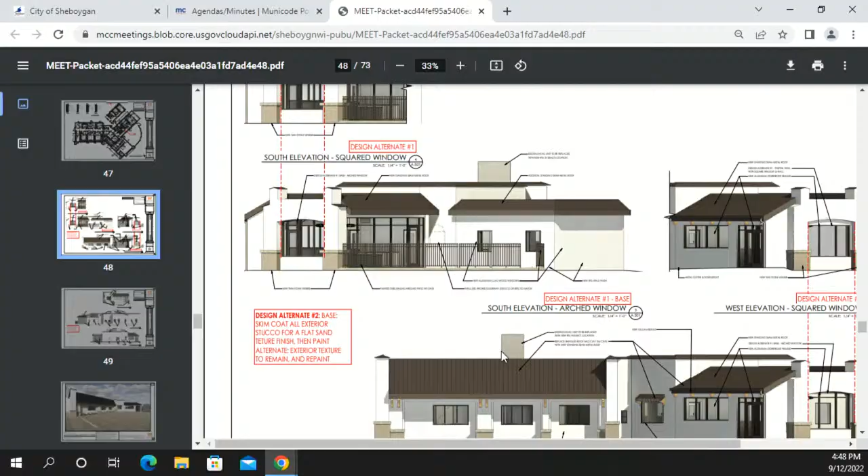No, I would say no, it's already screened, even though I'm surprised. There is like a 3-foot mansard roof on that side, which I think we're kind of not depicting well in the elevations. But in the existing, that mansard does come higher than the roof elevation by about 3 feet. So that's why you're only seeing that little bit of sliver in the actual street view, and there's a big change in elevation behind that mansard asphalt roof there.

But that mansard roof height is being maintained. Correct? Yes. Okay.

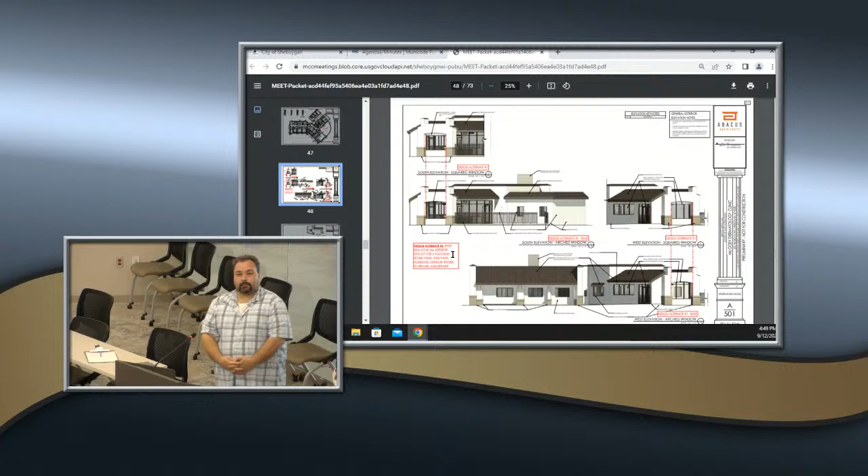And then I think my only other question was on the roof edge detail, where it's currently clay tile on the upper elements, with just a little clay tile cap. You're replacing that with the metal roof, and it's basically just showing as a line in the elevations. I'm curious what kind of actual treatment for that roof edge detail, whether there's a fascia, or a drip edge.

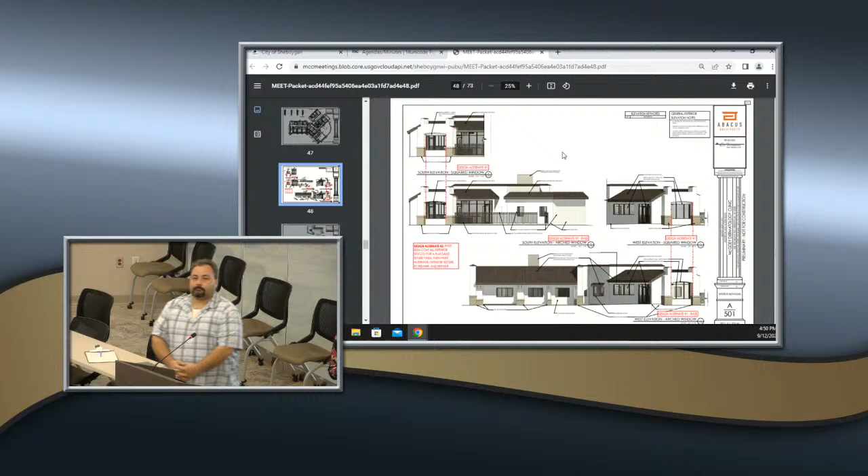There'll be a small fascia on it. We're looking at just a pre-finished metal cap, so there'll be about a 2-inch overhang, and then pitch it off the top to get the water to slope. That's one of those elements where that level of detail in the construction is going to make a big difference in how the whole building feels.

If it's done well and neat and tidy, it'll be great. But there's potential for it not to be done well and for it to end up looking cheap when it's finished. And can't tell from this which way it's going, so it sounds like your owner's going to want to make sure that it's done the right way. Yep, absolutely.

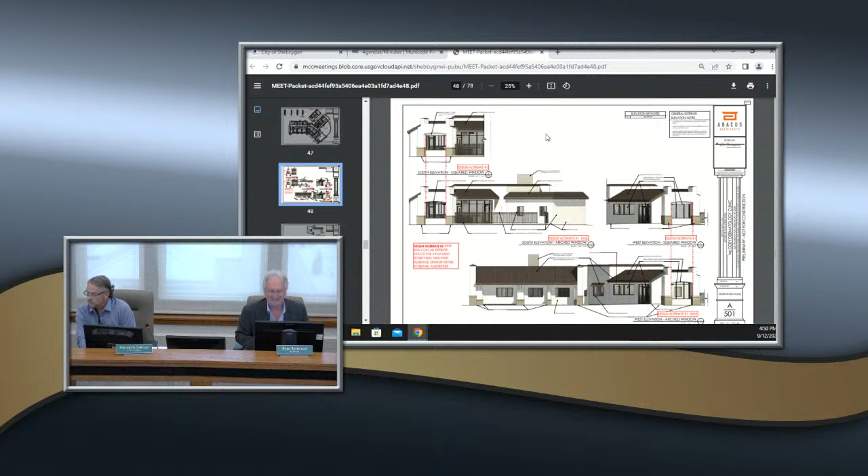Other questions or comments? Yeah, it's just a great relief to get a different building there.

In that case, I propose to approve as submitted with the alteration that's acceptable to staff on, what elevation is that, the east? It'll be the southeast. The southeast elevation, the two faces angled towards the south elevation, facing Michigan.